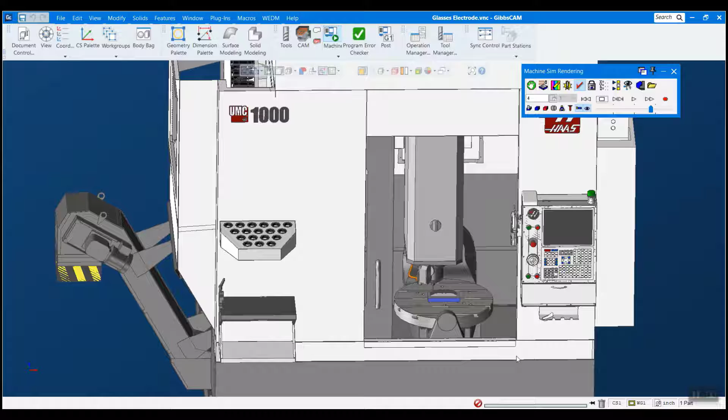So this is an older version of GibbsCAM here that I have my machine in, and I want to get it running in my new version here. So I'm going to stop this, and we're going to switch over to my new version here. And this is just a splash screen. I haven't loaded in a part or anything like that.

I'm going to open up my File Explorer here and just navigate to wherever you saved your package file, your zip file that you got from your reseller. And I'm going to be loading in a Haas UMC 1000 in this case, the same machine you just saw prior. And all I have to do is click and drag this and drop it right onto the GibbsCAM splash screen. And a post-package extractor comes up here.

It's called the post-package extractor because your machine typically comes from the post department and it works with your post to create that simulation. So all of these are actually the individual components of the machine. It's not an assembly. This allows us to move an individual component without moving other pieces. So these are all the different pieces of our machine. You can see there's quite a lot to it. And you can just go ahead and hit OK. But in this circumstance, I'm going to show you Open Target Location just to show you what it did here.

So this is my GibbsCAM install directory. And if I go into my machine sim folder here, we can see that it has taken the Haas UMC 1000 folder and put it in here. And here's all the components that I was just talking about. In addition, it took some of the other things like the MDD, the machine definition document, and it's also sorted that into your install directory. So it did all that automatically. This is definitely the recommended procedure for how to do this here. So I'm going to close that out and hit OK here. So now we're ready to open a part and see our new machine.

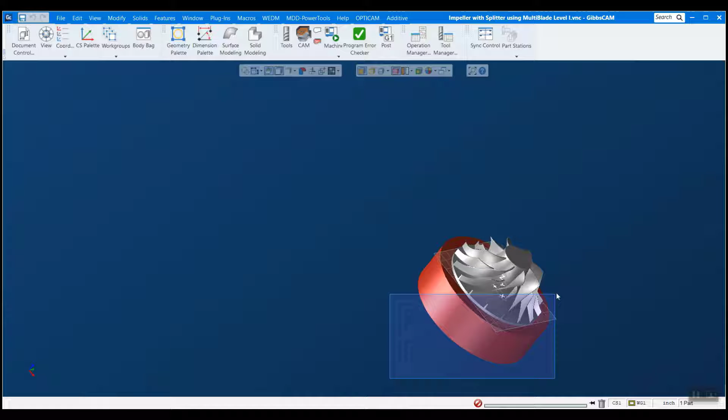I have here a 5-axis impeller that I've previously programmed. And if I open my tools in CAM, you can see that I do indeed have a couple operations here. So the first step to doing this is we want to go to our document control box here. And this is a list of all my MDDs that I have. And you can see that Haas UMC 1000 is in fact in here. So I'm going to select that as the machine that I'm using. And we have to make sure to match this to our simulation here. So I'll show you how to do that.

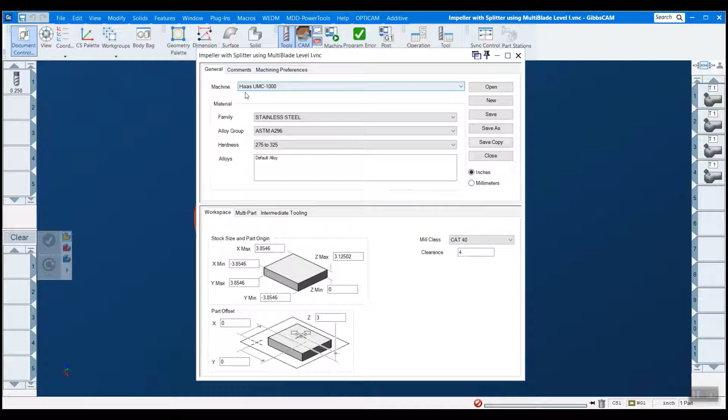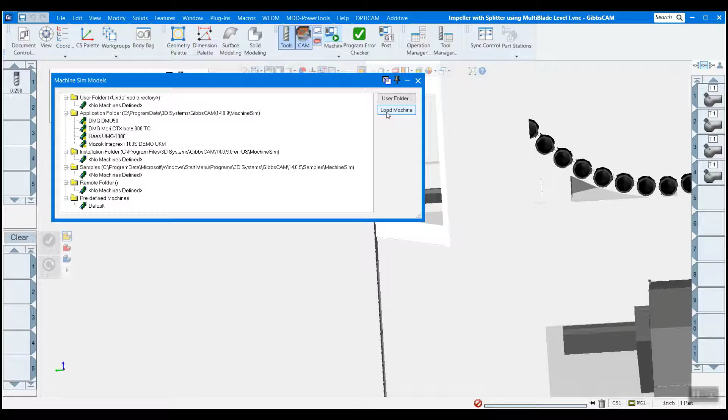I want to use the machine simulation, not OpSim, because machine sim is the one where we can actually render that kind of stuff. And it won't be loaded in by default. What you have to do is go to load machine here, and these are the 4 machines that I have, and I'm going to hit load machine, and it loads it in. It's pretty simple. Might have to rotate, get the right angle to see the front here, but that's our machine. You can see it only took maybe a minute to actually get this in and working and running.

And there's one more thing I like to do before we actually simulate this. One thing is turn on program error checking, and this will check your program for errors like the name denotes. And then the other thing is collision checking, and you want to make sure that that's on, and that's going to detect throughout the simulation if anything collides with anything else. And it doesn't have to be the stock, it can be fixturing, it could be components of the machine, any solid model that you see here. If 2 things collide, it will let you know.

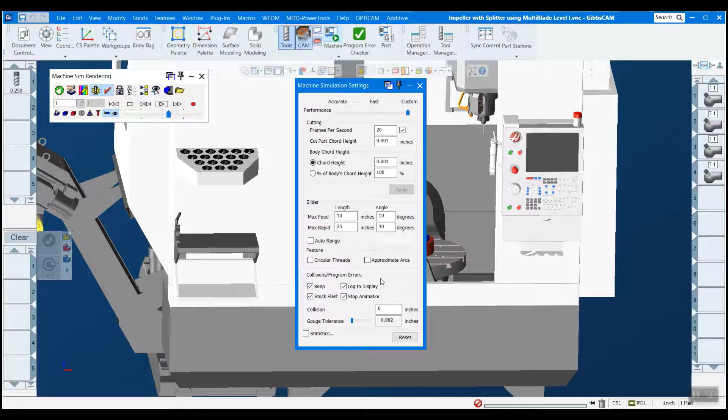Okay? And then the last thing we have to do is right click on the bar here and go down to settings, and you can turn these on. I like to turn all 4 on, but basically what you're telling this to do is, hey, once I've found a collision, what do you want me to do about it? So I want it to beep, I want the stock to flash, I want to display, and I want you to stop. Okay? So now that that's done, we're ready to hit play and see what happens.

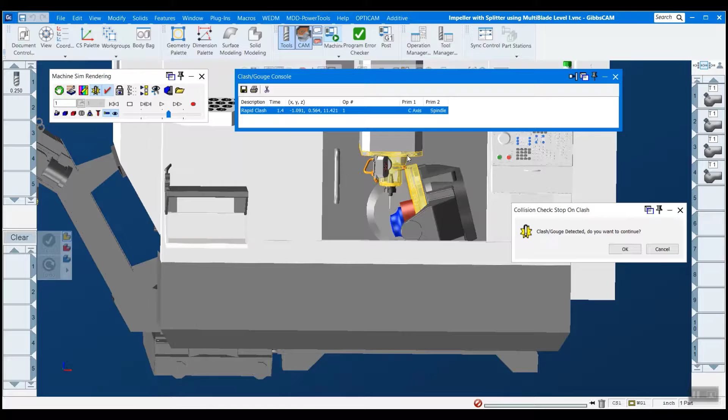And you can see pretty immediately it did indeed find a crash, and it tells you which components are colliding. So we have the C-axis hitting the spindle in op1, and then it gives you the XYZ coordinates of where that collision is happening. And you can see it also turns the two components yellow, and there's a nice little red dot there showing you where these collided.

So as you can see, it only took about 2 minutes to actually get this set up and working with all the settings that I like and that kind of thing. So it's pretty easy. Ensuring that you have an accurate machine simulation is key to many kinds of advanced machining, as well as protecting the investments that you've made in your machines. In GibbsCAM, it's easy to set up and use your machine using this method.